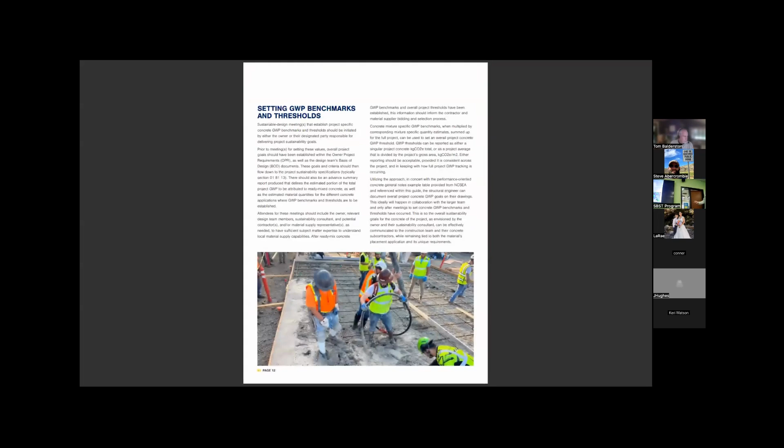Don Davies from our local MKA, former president there, led this task force. And as you go through here, I just point this out—oh, is this working? Oh. As you go through here and you see how it classifies global warming potential and timelines, you're going to get to a point where you realize, okay, do I really want to go through all this? And the answer is, if it's structural, then the codes of the ACI and the American Society of Civil Engineers will dictate, yes, you're going to go through this and you're going to use prescriptive mix designs.

But when we look at the world, the built environment, how many things are made of concrete that are non-structural? Just start throwing things out. Retaining walls, sidewalks, curb and gutters, catch basins. What else? Roads—well, bridges and freeways, but yeah, general residential. Right, you know, you get plenty of strength out of 2,500 psi concrete to build a ton of objects. We've got vertical gardens going. We've got all kinds of interesting projects that Lindsay's working on. And single story is certainly achievable with lower PSI mixes.

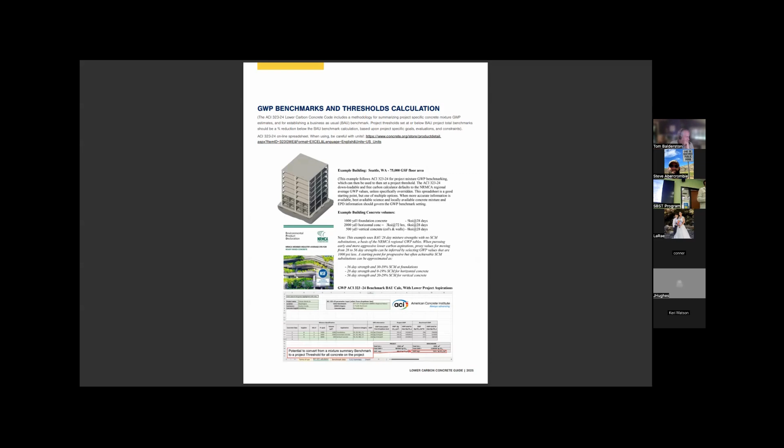But the reason I bring that up is because you have the carbon calculators in here that are being publicly sourced, and it's going to provide a database. And this is how you can move the ball forward towards carbon neutrality, is by participating in that calculator that they provide. So we'll just go back to presentation.

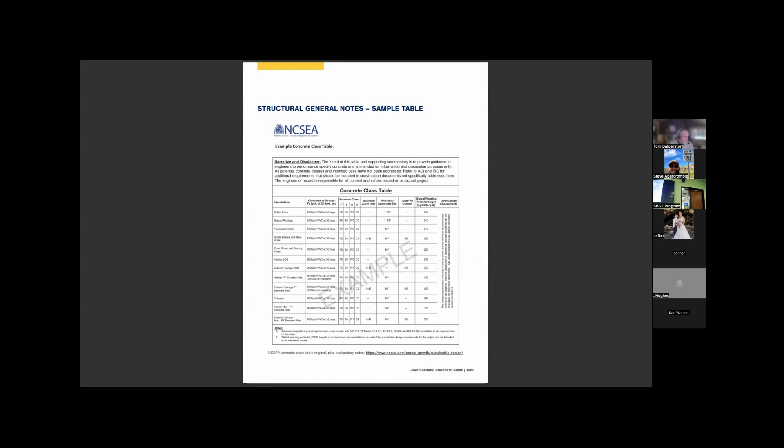How many of you have done a low carbon concrete project of any kind where you really pushed it? Anyone? 1, 2, 3, 4. You don't count. Ray? I got a low carbon project I'm working on right now.

Good. So here in Seattle, a lot of people have heard of Portland limestone and all that. It's been around for a long time, but it was used at such low levels, like 7%, nobody even knew the limestone replacement had gone in there. If we were to reinvent concrete, Portland cement wouldn't be the binder of choice. And just for the basics, there are 4 basic ingredients you have to have in concrete: cement, sand, aggregate, and water.

You get a lot of accelerants and admixtures and rheology additives and plasticizers, all sorts of things that pile onto that list, but that's still the basic 4 elements. And the nasty little secret, which is no secret anymore, is the binder, Portland cement, creates a lot of CO2 when it's being calcined, turned into clinker—not to mention the actual heating mechanism.

So that's where the idea of lowering—concrete's very indispensable. People wanted to lower it, and there were a lot of different avenues to doing that. Lowering the CO2 of the cement's a big start. Supplemental cement materials, fly ash, slags, other natural minerals are able to substitute out the amount of Portland cement you need.

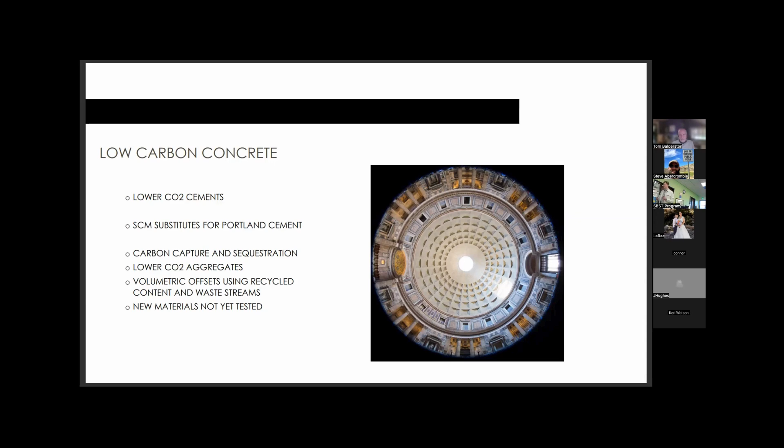So anyway, I got to move this along a little bit. This is not a small goal - it's a worthy goal. 8% of man-made CO2 comes from the concrete industry. So this isn't pecking around the edges for a couple of carbon dioxide atoms floating around. This is major, it's impactful, it's a worthy goal. It deserves our attention and a little bit of research by everybody in the design community.

Meeting human needs - achievable goal. I think right now there's a lot of different variations of what people set as their carbon neutral goals, different dates, 2045, 2035. But right now, the thing you can do is by incorporating things in non-structural applications, you develop the empirical evidence and trail for the engineering community to follow.

Engineers aren't trying to be a stick in the mud and slow down carbon neutrality - they've got a job to do, make sure buildings don't fall down. That's an important role in society, and they show a lot of integrity about that. So the more empirical projects that can be piled in and reviewed 5 years from now in 2030 will have a huge impact on the adoption of a lot of these greener cements and materials.

So that's where I want to jump into this, and I do want to make sure I save time for Lindsay because she's putting it into practice in a lot of ways already. And I also remind us that as designers and builders, we're trying to do things to meet human needs - housing, buildings, transportation, habitat restoration.

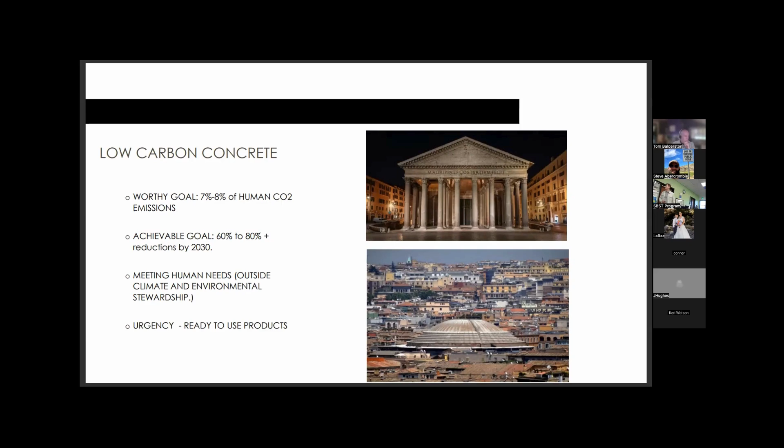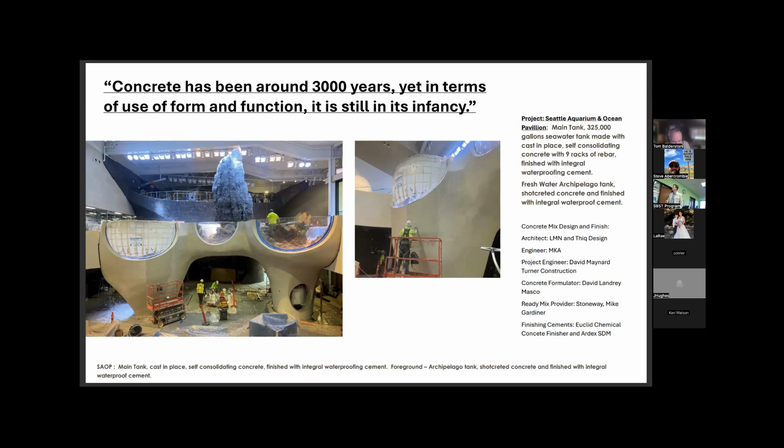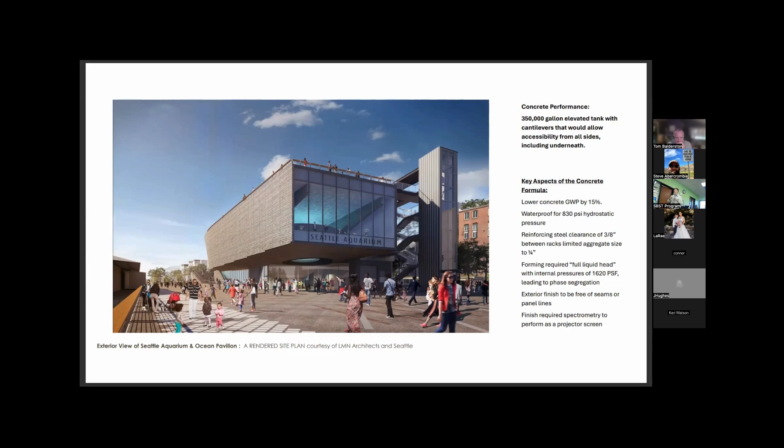When you think about this, their goal was to lower global warming potential by 15%, but the concrete had to be waterproof to 830 psi hydrostatic pressure. It had steel reinforcing with 3/8 inch clearance, so you couldn't use regular aggregate, you had to use sand. You had to have a full liquid head, meaning liquid from bottom to top in the formwork, which produced 1,600 pounds per square foot. When you have that much pressure, the sands will want to settle out - we call that phase segregation. And the exterior finishes needed to be free of seams or panel lines, and they also wanted it to perform as a projection screen.

Low carbon cement benchmarks - a pretty worthy goal. We're sitting here with a benchmark where concrete production produces 7 to 8% of human emissions. An achievable goal right now by 2030, I'm thinking I can demonstrate 60 to 80% reduction. There's a reason I've given a range of 60 to 80% - there are several different calculations, some from the EPA, some calculators like EC3 here locally, and they each come out with something different. I'll give you an example of how confusing this gets.

The concrete industry sells concrete by what dimension? Cubic yards. The EPA and everyone else measures carbon dioxide in kilograms. So when you look at the GWP, it is actually kilograms per... kilogram per square yard, what am I not saying that right? Cubic meters. Thank you.

When we go into the history here of going towards net zero, there's just a roadway littered with carcasses. This is a good man doing good work, but the first time he tried to take on the whole industry, he failed. I was at the ACI meeting when he debuted a beautiful carbon neutral cement from Calera Corp. It was a calcium carbonate. He was using salt water, brackish water, to sequester 100% of the CO2 from that. That behind him is actually the last coal-fired power plant in the state of California.

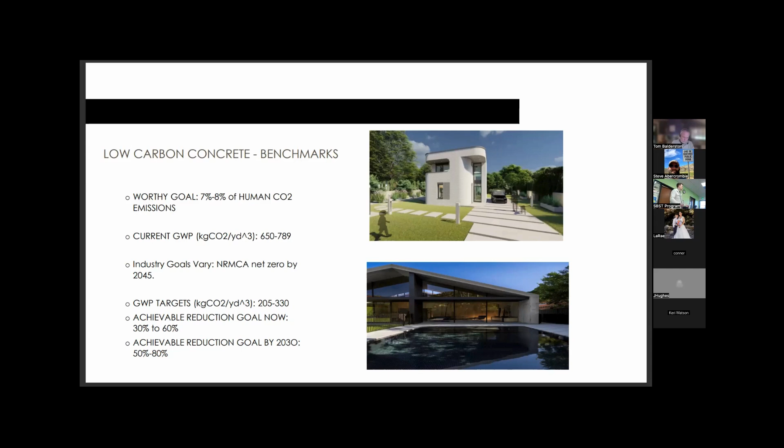For the NRMCA, it varies a little bit, but targets right now, just here in the Seattle area, are 205 to 330. This is a very local thing. In fact, even the ACI right now has 25 regions that differ - it's all about local, what's available, who do you know, how does the community collaborate, can you get this cement in the market on your job logistically and feasibly. That's a tough question, so they're actually expanding it from 25 regions in the United States to 50 so that people can work with their local suppliers.

Achievable reduction goal right now, with what's on the market and what I'll call project ready - again going back to the lower carbon concrete task force recommendation - we'll call it project ready.

It's been proven in lab, it's been proven in field, it's going through validation against code. That's kind of where you want to live, because you don't want to be on the bleeding edge. You want to be on the leading edge. And that's where I'm trying to place this discussion a little bit.

By 2030, though, with just what we see on the technology horizon now, we could be very well on our way to a 50% reduction, 80% reduction in concrete GWP. So we're making some progress, that's very doable. A lot of people got to cooperate.

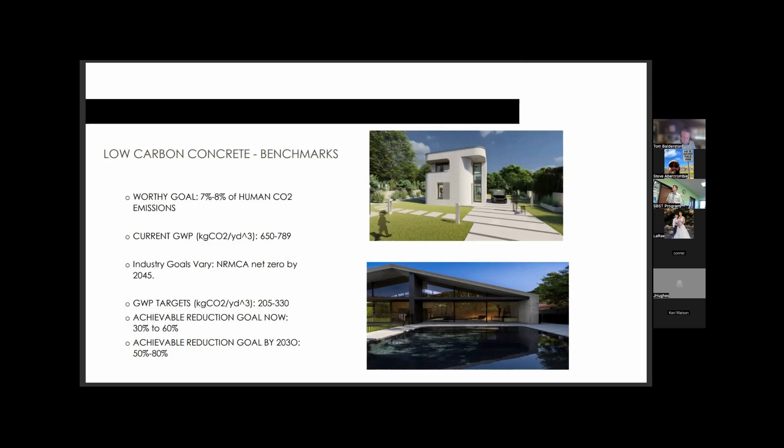So I brought here 5 materials. These 5 materials here, which I'm just going to run through real fast. These are all plausible and available.

First of all, you've all heard of type 1L. There's also type 1P. The P stands for pozzolan. The L stands for limestone. In essence, these are added and blended into the Portland cement to produce less carbon dioxide total for the cement without decreasing the cement strength.

There are differences, though, and there is pushback. There's lots of people saying they got a problem getting it beyond this range of 11 to 15%. Most people here in Seattle are running 13.5% limestone added. Does anyone have any questions about what that means? Adding limestone into your Portland, what that means?

It means a slate limestone that's been dried but not gone through and released all the CO2 is blended into the Portland cement. It slows down the setting of the cement a little bit, but its ultimate strength is equal or higher in lab. In practice, it changes some of the mechanical properties of the concrete, and there's been some questions about whether you can get to 30%, and how far are we going to push down this road before it's not concrete as we recognize it.

So I'm working with a lot of people who are trying to look at the stuff. Even the school here, Mike's group, has opened their doors to looking into this issue. So, can you use that in addition to fly ash? That's a more complex question.

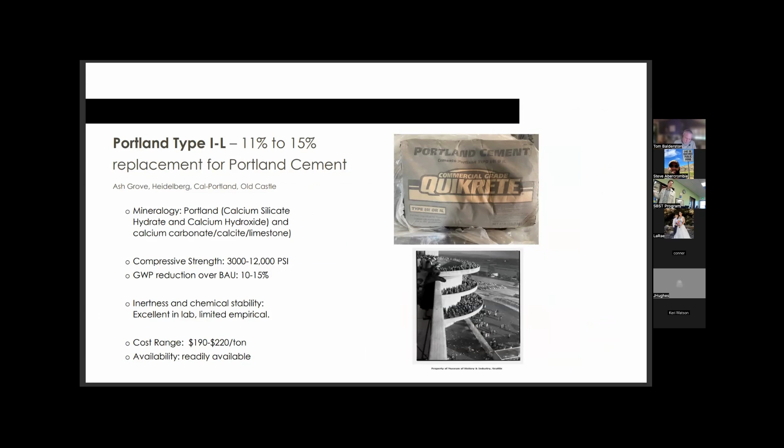And this is important, everyone should know, regular concrete... oops, went too far, where do I go backwards? There we go, sorry. Regular concrete Portland type 1, I put the cost range as 190 to 220 a ton. Big difference between whether you're buying silos of cement or a bulk sack or a little tiny 50-pound bag. But keep that in mind, it's important to have a relative idea of how much it's going to add to things.

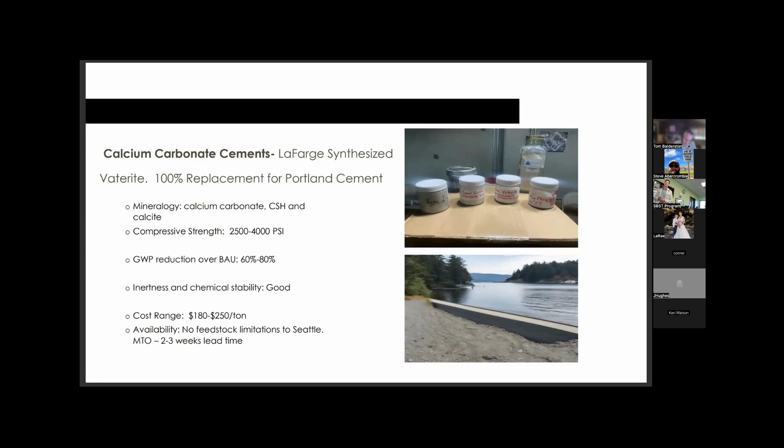This Vaterite is running about 180 to 250 per ton. Its availability, there is no feedstock limitations, but it is made to order with a 2 to 3 week lead time. We have two resources for it: we have Lafarge, and then they have Forterra.

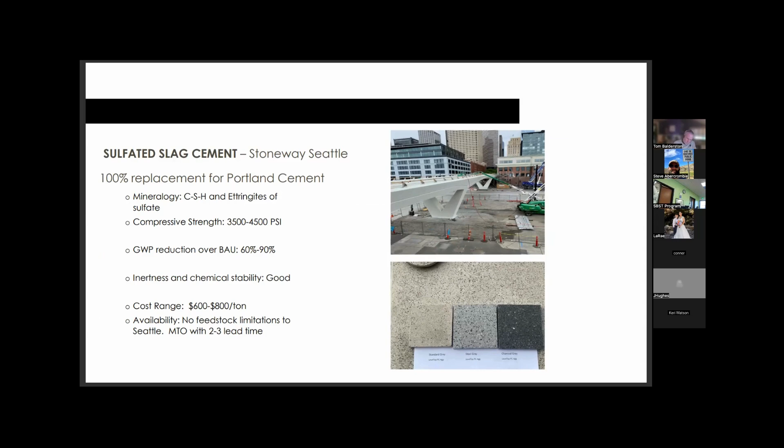That's integral color. Yeah, the natural color would be that one right there. Okay. Yeah.

Finally, this one's not a cement, it's a super... or excuse me, I didn't have a category for it, so I called it the zeolite guys. I guess because it has an improvement in reactivity with Portland cement and plays well with it, it's a little different than your typical SCM, which is fairly neutral. It might improve workability, but it doesn't really improve performance, durability, and strength. This particular SCM does, called Zeolite.

You're going to hear more about it. They might have bigger future plans, but again, I'm trying to keep everything here and now. What is available? What do we know? It's up to 50% replacement of Portland cement.

That's a pretty good reduction in your CO2 content, your global warming potential, and this is important, without compromising the strength of your concrete design. So if you have a 6,000 PSI structural concrete mix and you put in up to 50% zeolite, you're not going to see a change in your 6,000 PSI structural performance.

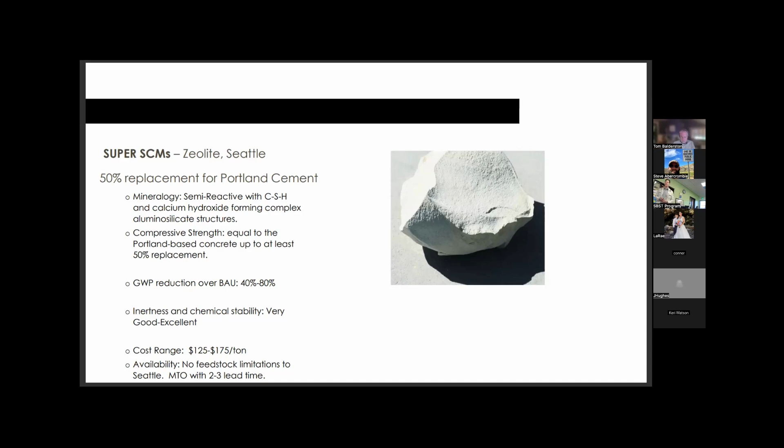Inertness and chemical stability on this is very good to excellent. The cost range with freight to get it here is about $125 to $175 per ton, so it's less than Portland cement. No feedstock limitations. It's made to order. The natural material is just laying on the Mojave Desert floor, so it's not manufactured. It's just a matter of getting it here.

I didn't know Heidelberg would be here, so I'll probably never be employed by Heidelberg, which is unfortunate because they're an awesome company.

What I was going to say is, don't let the perfection of being net zero and going as fast and aggressively as possible get in the way of doing something.

A lot of ready-mix people aren't going to be thrilled about cleaning out their silos and throughput mechanisms to load up your truck. So if you've got a project that's 20 or 30 yards of concrete, you're going to get charged for that if the ready-mix guys really want to do it. You might be better off looking at your other mix options.

I'm just going to run through a few of them again, trying to be practical. Yeah, you're talking about the currently available mixes you've heard of, like Brimstone Energy, calcium silicate, 100% offset, which supposedly should be available in the next 5 years or so.

No, I definitely have a list of about 100 things that would be fascinating to talk about, but my criteria was being project-ready and available in our market here now. So some of those didn't make it onto my radar.

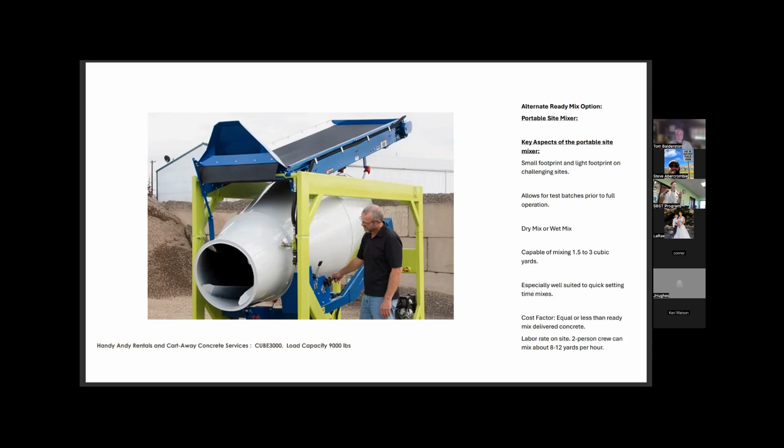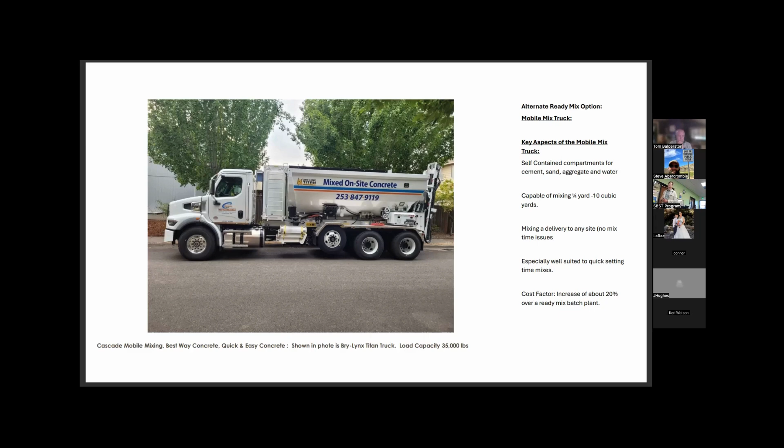This is really great because on some sites you're not really close to a batch plant. This can go anywhere, and they don't mix it till they get to the site. It increases your cost factor about 20% over the batch plants.

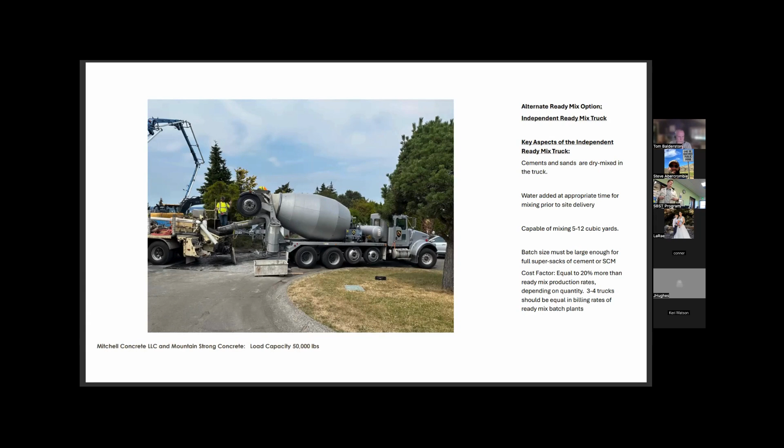And finally, there are some independent ready-mix trucks. These guys generally will get their aggregates from whoever is the local aggregate supplier, or will have an agreement with somebody. But the people I talked to on this particular issue were happy to take a super sack of any of these low carbon cements and dry batch it. That means the truck has to be dry inside, dry batch it with the aggregate, and then add water at the appropriate time as it gets to the site.

And these are the contacts and companies in the small, medium, and large mixing world. I'm sorry to have spoken as long as I did. There you go, Lindsay, you're good. I think you're good.

Thank you, everybody. My name is Lindsay. I'm a landscape architect, and I started this journey, started the firm about 3 years ago, and really put it into practice over the last year after going out and trying to understand it myself. The title of this is Site Features 2.0, rethinking some of the things that I have to deal with in the landscape architecture world. I'm excited because there are so many different professions in this room, and part of the journey has really been learning and meeting new people along the way.

I got to figure out which direction this goes, or where I point it. The top arrow is forward. That big one, got it.

Okay, so real quick, this is me. I own SKAPA. I have 25 years of experience as a landscape architect. Some of you I know. After that 25 years, I really looked at what the idea for the firm should be, and I wanted it to be different. So I've taken this firm and flipped every single thing around based on my experience in other firms, where I've run and managed and stuff.

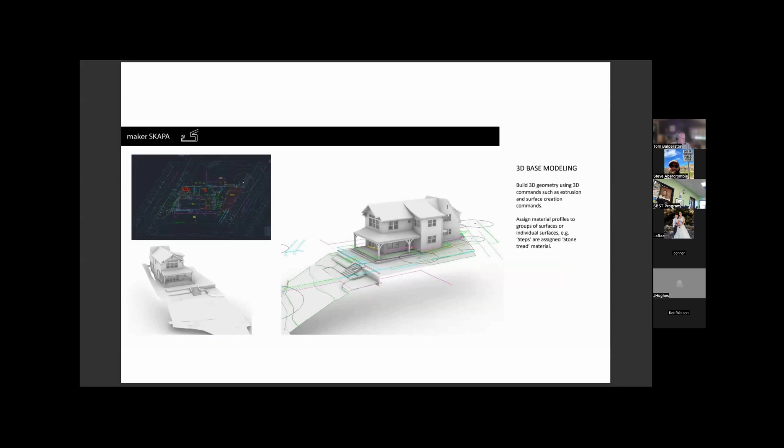This is a typical workflow in a design office: CAD, modeling, going back and forth between the two. So this is what we're looking at on our screens. The idea of the blender, what I call that person, is someone more likely to be in an architecture office, a design office.

They are working on the modeling and selling the clients with Lumion and all the renderings you're seeing for all this. But they're also very knowledgeable about all things 3D.

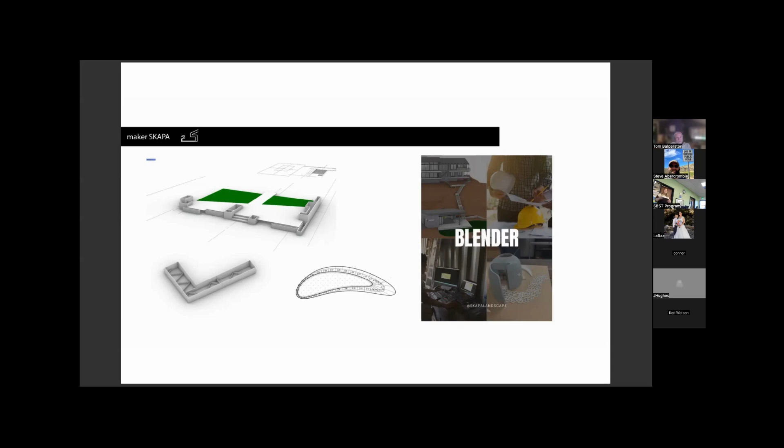So you might be looking at a master plan, but you see components like this. I'm clearly looking at the landscape, but finding components where maybe we can implement other technology to accomplish those. So I see Blender being able to understand this.

They also have to be able to talk to the slicer. And the slicer, I envision as somebody that works for a general contractor out in the field. This is guaranteed the new layout - we've actually put a Sharpie in the machine and drawn the layout, but the field is going to get your file and run a dry run, and you're going to hope that it works. If it goes way out, they're going to call back the Blender and ask them to fix the file.

But a slicer should be able to deal with tolerance on the site. It's never going to be a flat site, and these are actually things that you'll see. So the slicer would see - the robot will actually tell you whether you're off or on, but you're wanting to read that. You're also thinking about construction management, how you're going to print these. So you know about the space.

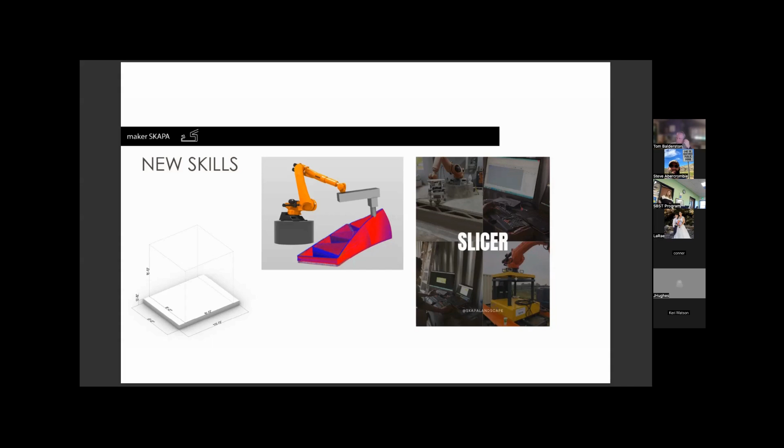And so from here through the next few slides, I'm literally taking you from the process of when you see it as a designer all the way through to the implementer. So these are typical Rhino models that we use. We go from Rhino into the machine.

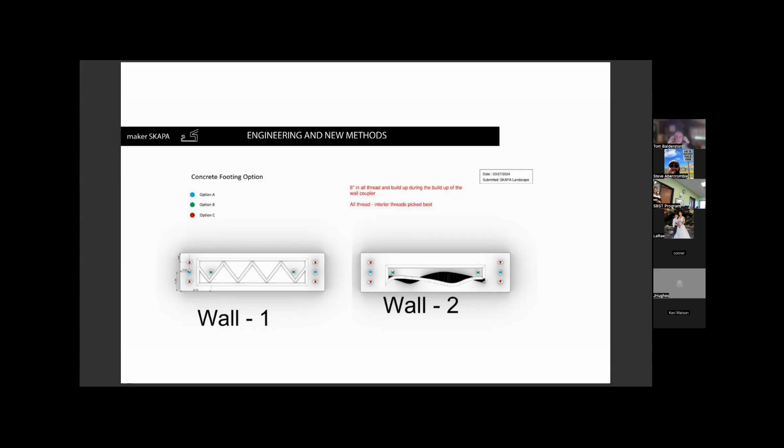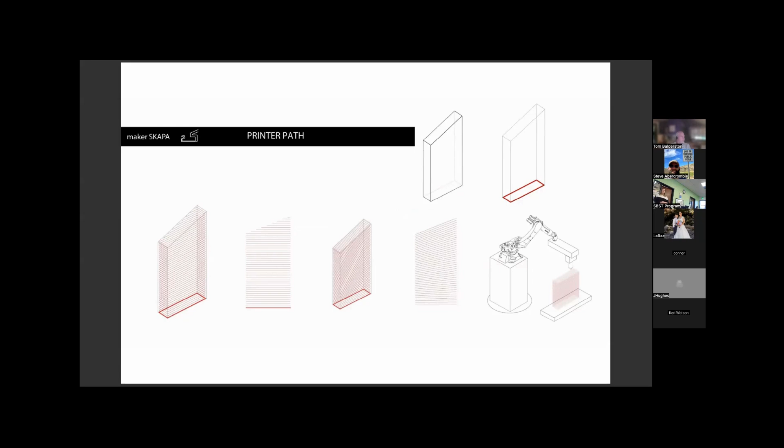This is a typical - okay, so you're a designer starting to work in SketchUp and you're thinking about these things. As you move into development, you're starting to think about printer paths and layers and all the different things you want in a design, and you're starting to implement that kind of in your blueprint phase, the next CD set.

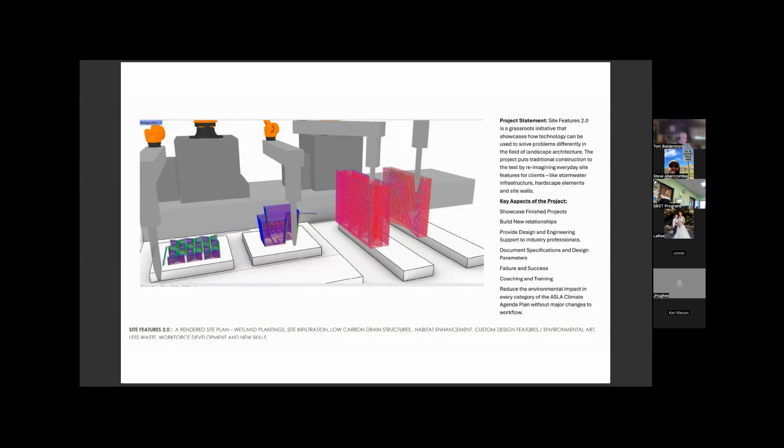And we might set up and do all three of these in the day. You're going to want to kind of understand that. Anyone who works with concrete knows that.

The next step is obviously it gets out on site. So here is where the journey collides with this building in the local 528. Because for me, I can only do so much - I rely on the craftsmen and all of the construction to actually implement what I want to do.

I am so grateful for this relationship because I don't have to worry about quality. I know that they don't want something to fail. So if my designs are being built by the union, I feel like they are really putting in all the effort that I need to actually construct it. That makes me feel very confident in trying new things.

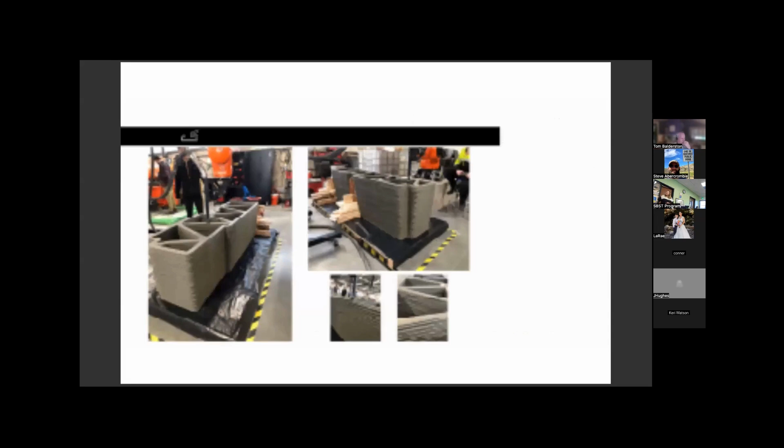So on the left there is Jordan, in the middle is Cooling, on the right was Angie from the robotics company, all working on this the first day. Jordan worked on the robot from day one. Everybody was able to use their skills that they already have on day one and show up when this thing showed up here and set it up. That was eye-opening to me - it takes the whole team, but it was very easy to accomplish.

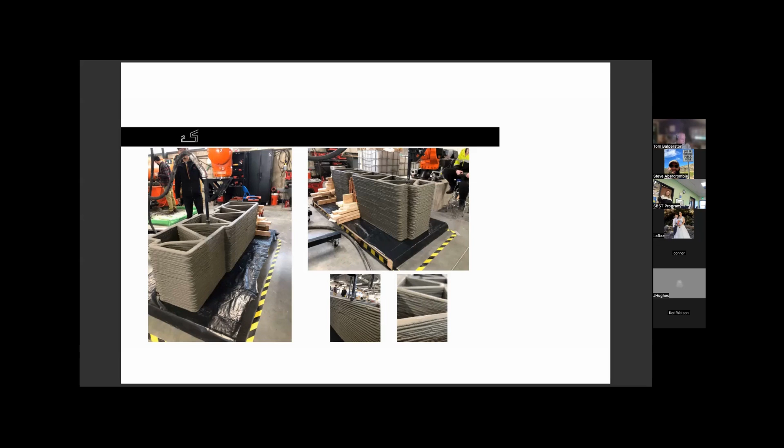So here's a picture of some live printing in a shop. As far as technology goes, I would say South Seattle College - some of the community colleges - are really teaching the actual technology of the robotics. That's where I'm seeing it, and they're the ones printing things. You have to have a guy like this to trust 100%.

So this is us doing a little bit with the union and then doing the mixing here, and on the left is the robotics technology. It is a 6-axis arm robot - it's a KUKA. That's not the proprietary piece; you can find KUKA doing everything in factories. In fact, it's bagging the cement that you're buying in the factory. It's crazy.

The proprietary part is the actual slicing and putting it in and having it read it and print it out, and that's the thing you have to learn with the actual robot. However, I still see it as a tool - no different than a tractor once you get used to it. An architect or designer would still need to know whether they're going to build it with that robot or a big gantry system, that would change things. But outside of that, you're specifying what to use.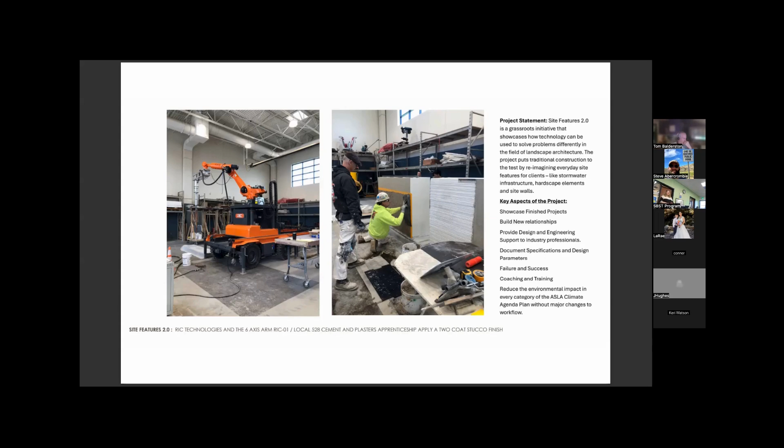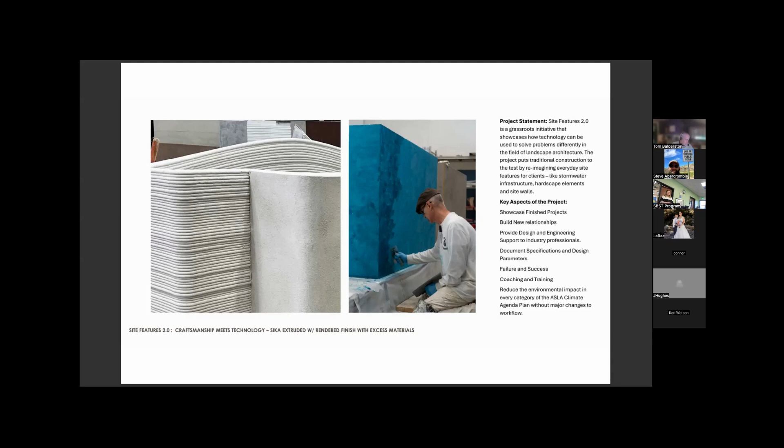That's where the Plasters Union came in, Cement Plasters Apprenticeship—that's them on the right finishing it. We're going to walk around and see a lot of these finishes, exterior and interior, more than I could have imagined. On the left is a layered look finished with leftover material, next to it finished with excess Sika material, and on the right, a Venetian plaster.

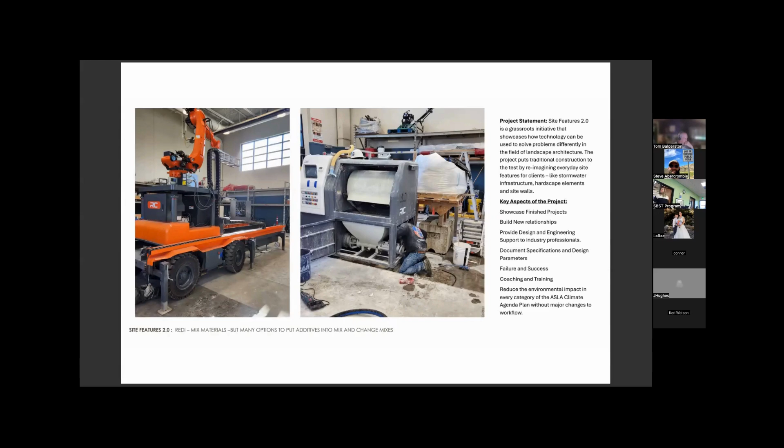I show this picture next because it's the mixer, and that's really the key to some of the next slides I'm going to go over.

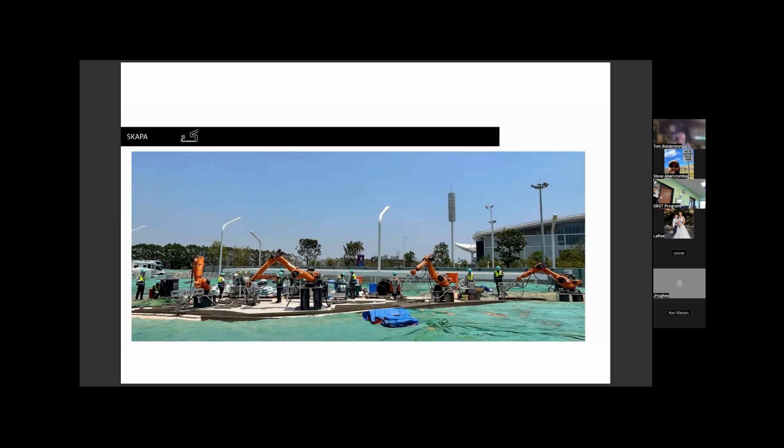Which gets me thinking about actual green infrastructure and projects—so that's this section. You'll see the process, how you get there, and how everybody in this room should be able to relate to one of the earlier slides as to what they might be doing day-to-day. I really wanted to reevaluate what I do in the landscape.

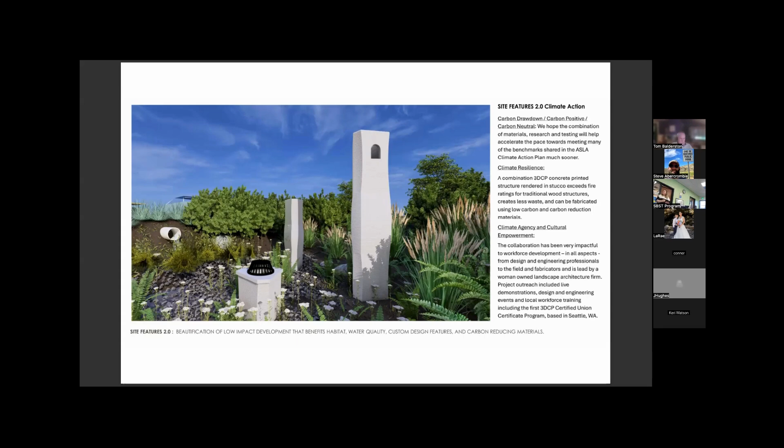However, maybe they could. Maybe we can have more artful features and habitat included in these things. I'm looking at ways to not only solve carbon but solve many problems with one piece—how many more things can we do?

This is another idea where I started pulling across pieces. I'm using low impact development standards set forth by the city as my guiding principles. If I can show the city that it works and holds water, I'd call it a bioplanter—it might or might not meet their standards, but I'm trying hard to show that it can. So this was rethinking things.

This is a project in Greeley, Colorado, where we're doing some low impact development. I'm implementing some parts of this, not all, but the idea of being able to implement small projects with a smaller workforce, or even build this in a shop and bring it out to a site to drop in stormwater planters—those are the kind of low-hanging fruit I'm looking for.

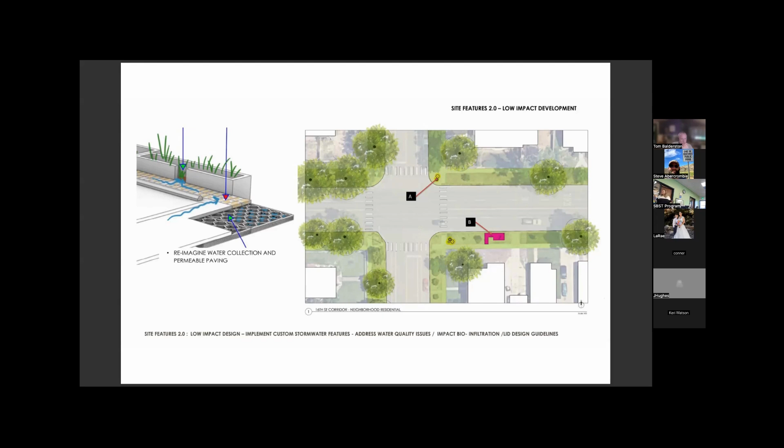This is a stormwater planter that I printed. It would have met all the standards for a City of Seattle project—it was modeled after a house project. The city requires that much bio-retention, and obviously we have a general contractor; it's formed, and all kinds of work, effort, and waste goes into it.

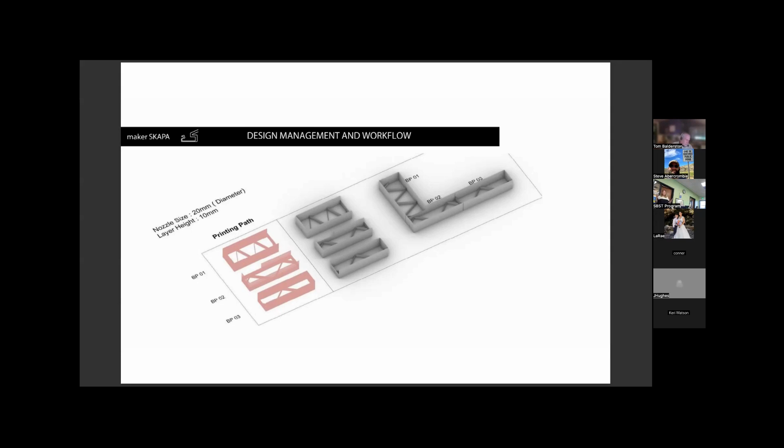They're big enough that I could almost put my truck in it, so I'm thinking about ways to just do that less. It's a 4-inch wall minimum on either side, but here I'm doing it with 2 inches—a lot less material—and it can be delivered to the site. This just shows how it might be thought of.

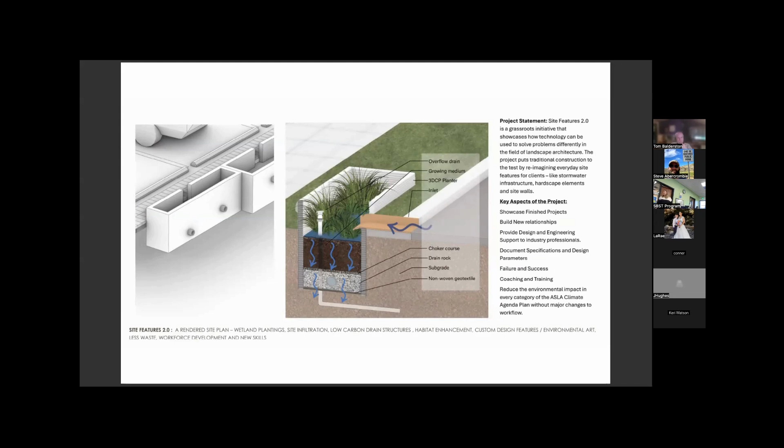This is another concept, probably something everyone's familiar with, the bioplanter, the non-infiltrating bioplanter. I just love this idea that they could be beautiful. This is one that we finished - it would have met the City of Seattle standards. We did a double wall just to get the thickness, but I could also envision this as a spa, being able to insulate these pieces and things like that.

We finished this one, but I think it took us 3 hours to print something like this, and to be able to do that with formwork - we didn't have any waste, something that could be dropped off on site. This gets down to an idea that I started to think about.

This was the first slide, and then I met Dave, and the next slide is one of my more exciting slides. I call this, for better or worse, the wet rat slab, because I have this idea that it could come in and store water and things. I'm being told by engineers to hold water on site, et cetera. We're always doing a regular 4-inch slab, but if an engineer told me I needed to do an 8-inch slab and manage all that water in one place, I'd be solving more than a few problems at a time.

Filling these with some sort of water quality material like pumice or other things where we're just trying to achieve water quality on the site. They're all things we have to do every day.

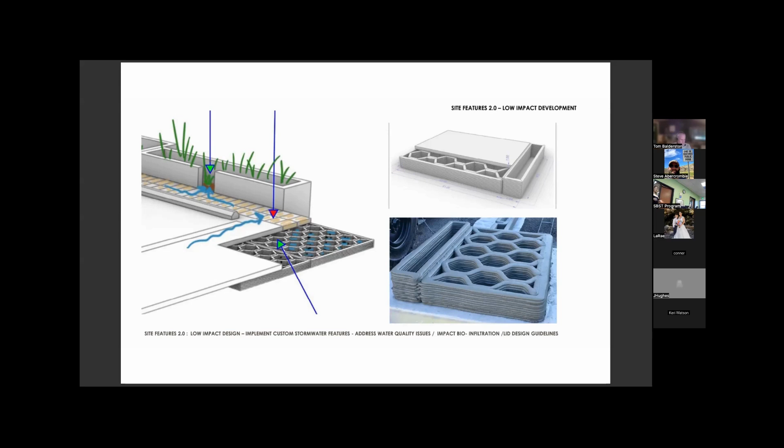I also do a lot of high-end residential. As much as I want them to want this, my clients don't usually want to go from their 2,000 square foot onto permeable paving. I'd really like to find a way to make something permeable, but also use more high-end materials to do that. So this idea that maybe I could bring water to a drain and then underneath in the slab - I feel like I could get a lot farther in some of my designs.

And then I met Dave. Dave had this crazy awesome idea that I really loved about all these mixes that he went through and spoke to, because the technology allows us to put additive in right then. Like, one day I hope to be able to put waterproofing in there and never need waterproofing if I did a container, a spa, a bioplanter, or a water feature. But this takes it to a next level because with that technology, we can switch things out - we do color, we do different things like that.

The different colors you're seeing here - the idea that we could do the orange, something more structural, almost like a bit of formwork, load-bearing pieces would still have this ultra high performance, approaching 18,000, incredible, 20,000 PSI.

And then, even in the same design, be able to switch it into something like a mortar mix where we're more CO2 neutral, to actually change while you're doing these kinds of construction things. That's kind of the thinking.

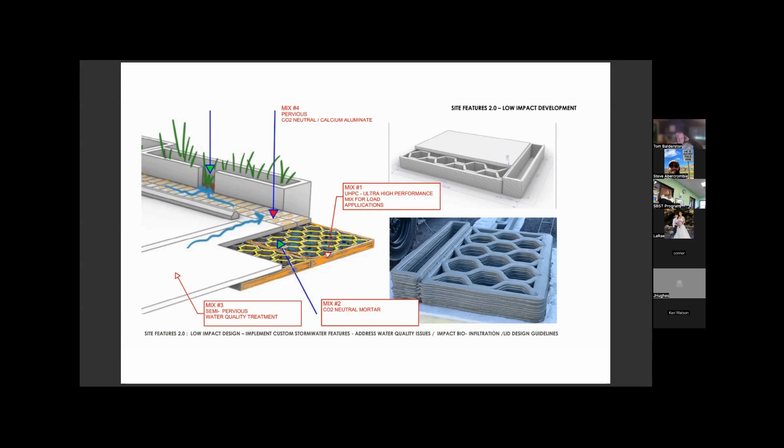Also, we know we have permeable pavers, but a lot of times the permeability comes from just the slot, right? So the idea that these pavers could maybe be porous and also water cleaning on top, somewhat of a semi-pervious wear tread in a parking lot, versus using monolithic everything all the time.

Rethinking the site wall altogether. I'm asked to calculate impervious surfaces for things like walls all the time, and you think you got it all down, and then you go do the calcs on your wall, and goodbye wall. So this kind of thinks about it differently - it opens it up to maybe being a planter wall, could also be a bioplanter, but just the idea of being able to retain something and plant it and not use it as monolithic, especially on the 4 feet and below landscape features - this idea of rethinking the wall.

Obviously, I can have a lot of fun with my designs. None of this has any elevations the same. It's built to kind of segment and go together. So if you wanted to have this on a project, maybe you don't have a general contractor, but you'd still like to have concrete on the project. This is a chance to do more custom features for people without as much expense.

I'm also looking at, in this situation for a small wall, why even have it be two? Why couldn't it just be one? You're going to go out there and you're going to see it, touch it. You can imagine just having a little smaller planter wall, and that's it.

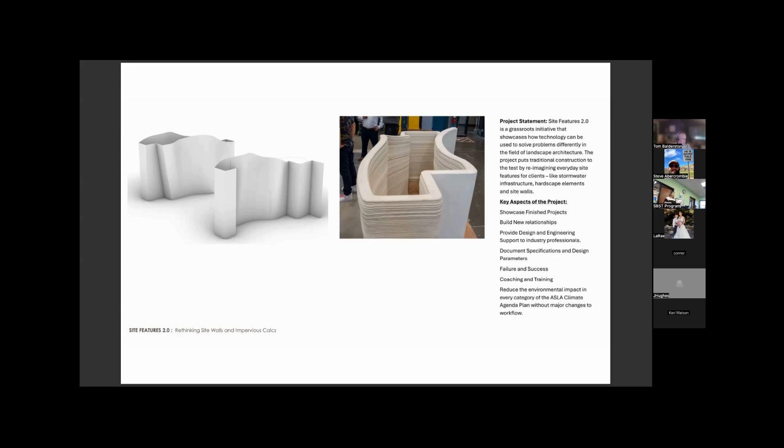We did a lot of different finishes here, so this one gets turned around. This was another idea that kind of started to generate. So now I have this gap in the walls. I can plant them, but I can also think about integrating passive, or maybe it's not passive, but somewhat of a mechanical opportunity to have a misting system inside these things with irrigation. I'm already doing irrigation, lighting.

This was a little bit of an exercise we did for the Seattle Design Festival, where we thought about walls. We all know we got a park, we put in lots of trees. That feels good and cool, but also there's this opportunity to maybe have site walls that go throughout that can also cool you off. So instead of a fireplace, a cooling place.

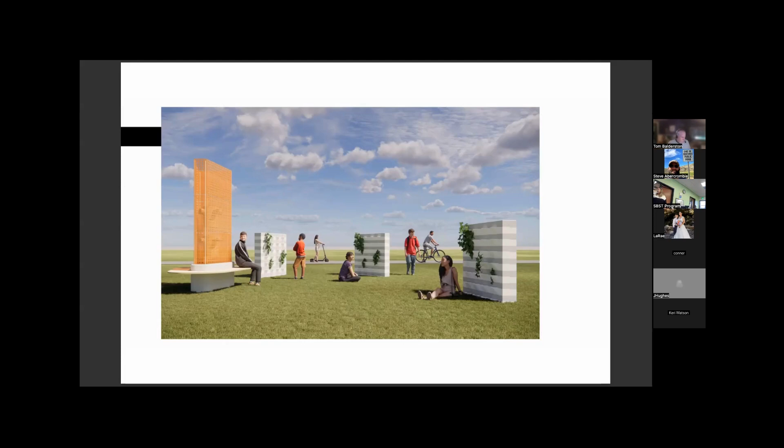That's what the tower was on the left. And this is here. So we actually built these with high school robotics, Mountlake Terrace High School robotics team. They just came in 16th in the world at robotics. I engaged them to help with this. By the time I was done with this introduction, they were already modeling it on their computers. My intern gets dropped off by his mom. It's awesome to incorporate that into this, thinking of hiring different people and asking different people to help.

Climate resiliency is obviously big on everybody's mind now. So this was a chance where we invited the fire department to come and give us some data, because to be honest, the insurance companies don't really have the data. You can kind of sit there and stare at it, but they don't really have it. So we're trying to actually build things so they can come burn it down and get that data. And ideally that starts to get things into code, more acceptable.

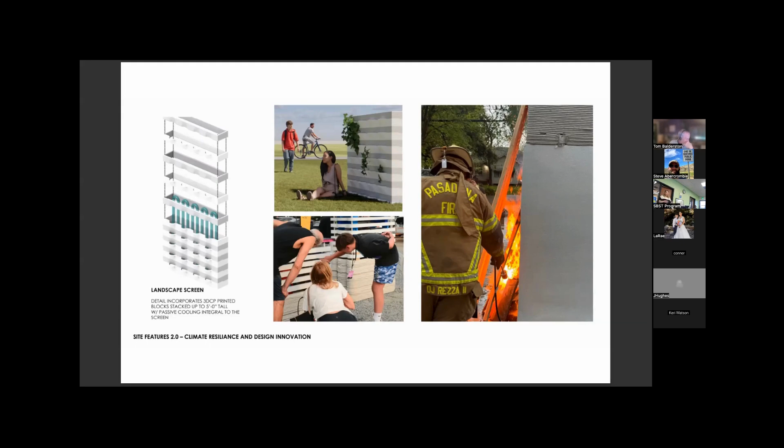The things that have been built to code today are basically off the masonry code, following masonry code for the most part. So we do use reinforcing and things. This one is one example of many ways that people have really solved some of the reinforcing. This is a threaded rod, so you're able to thread it up as the machine moves up. It's got its top and bottom plate. And then we're also just pouring the column into the design, so the design is part of that thinking as well.

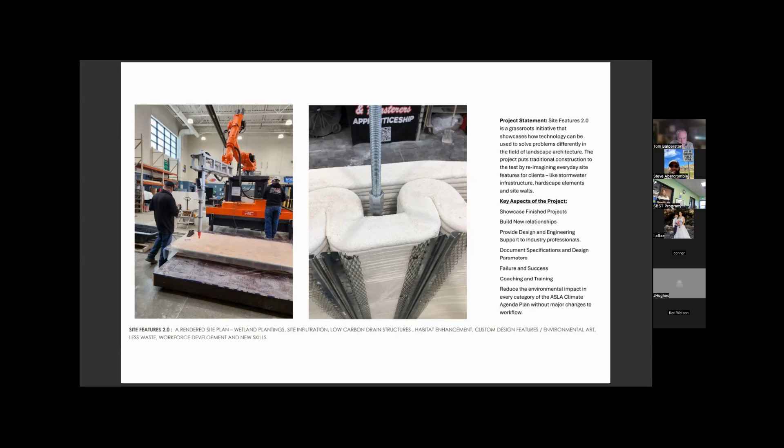And Jordan back there, when we go walk around, I hope you get to see it. There's an idea about skeleton footings. We have a lot of cool names: wet rat slabs, skeleton footings, things like that.

This one is kind of for the architects and everybody, but really it's wanting to show how this process works. We're going to go and do custom features for our clients, and then we're actually going to be able to print these pieces here and finish them the way we would want them finished anyway, and drop them off. No form work, and ideally using low carbon concretes.

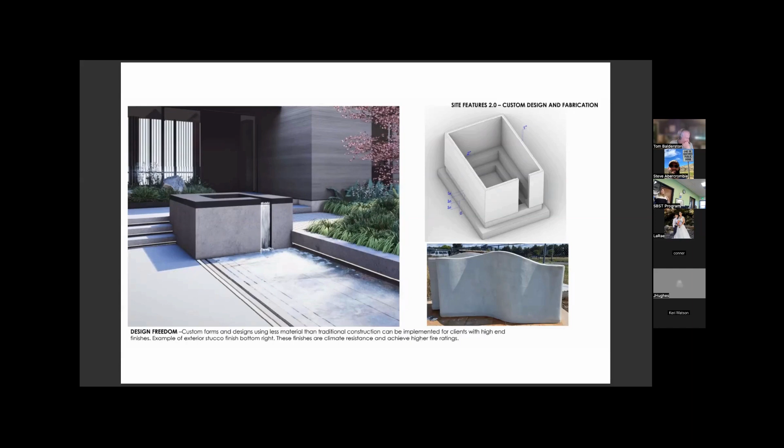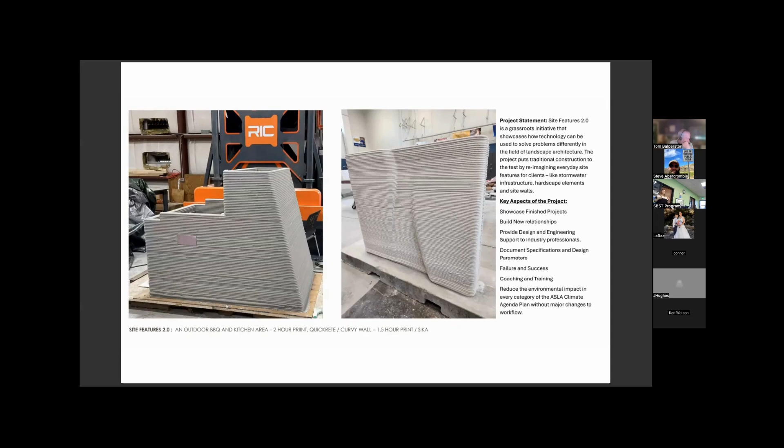I have printed mostly with Quikrete and Sika. Sika is low carbon concrete at the high end of that range, but there's the opportunity to do things in the landscape with different mixes, things we've achieved in the design. That was like a barbecue fire, outdoor kitchen type situation. This eventually gets rendered and has become part of the gallery out here, but I can see that as a water feature wall or some sort of screen, and it's an open cavity.

So the reason I end on this slide here is because I am here to say, a lot like Dave too, is that I'm not necessarily here to preach. I am not necessarily here to teach, even though there's components of both of those things. I really am here to coach people in how to use this. And I've gone through it. I believe in this.

I see this as a way for me to maybe bring it to others. In my mind, this is my ideal shop where you have a gallery, the design office, the robotic construction shop, and maybe finishing bays outside so any contractor can come. It's a lot to ask someone to invest in this all, but if there's a chance for me, a small firm, to implement the signage at the convention center project that I might not be able to win, it's a chance for people to try it, learn it, feel comfortable with it, use it when they can. Bring your own files down. That's what I ideally would like to do.

I have spent time now in every one of these stations and feel very comfortable with the technology, and just get really excited about it moving forward. Materials lab is where? Next door.

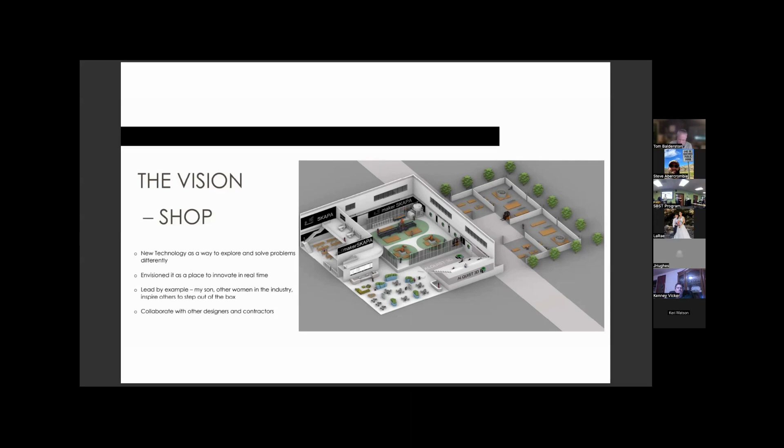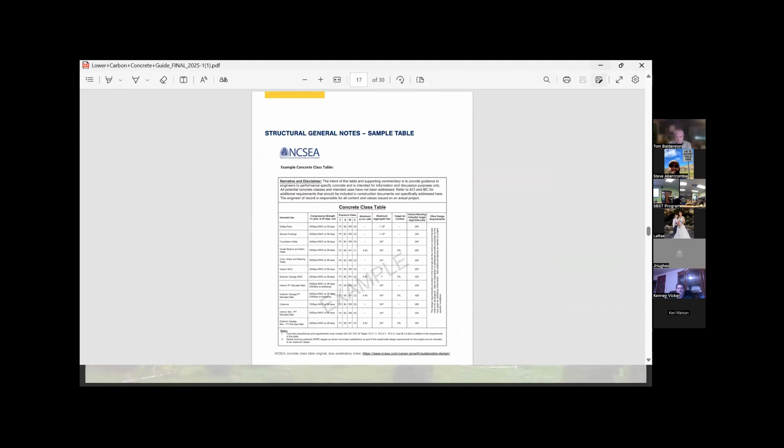So I'll go in, if you don't mind, John. That's part of the reason we're here involved. We believe in technology, economics, low carbon. Unfortunately, I've made a good living in an industry that is polluting the world. I can admit that, but it is a structure that has to be done. This is what the world's built on, is concrete, right? So I'm excited to know there's other partners in the industry to help produce these structures we need, more environmentally friendly.

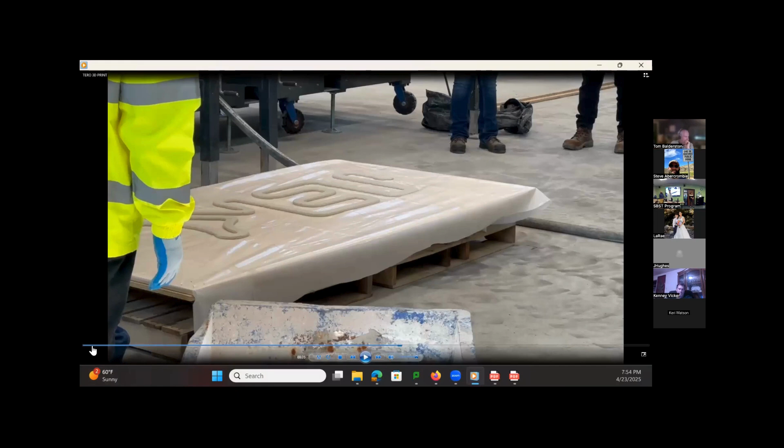And we all need to collaborate together because we've got workability and finished product in the end, because we know lab results are completely different than real world results. Dave asked where some low structural projects can be done, projects that can be tested real world now that can promote more people to be involved, more industry partners to help move things along to a higher volume level. We have to start small, right? Be it our sidewalks, our planters, our bioswales, 3D printing, all these different options that we have. We're excited to take part of that and help bring you guys here and be a part of collaborating to help better the system.

Stay in that tight window, because if we fail, the world's gonna say that doesn't work. Hey Mike, give this a minute, I think I'm sharing this on the screen. You or Jordan could say what we're seeing here.

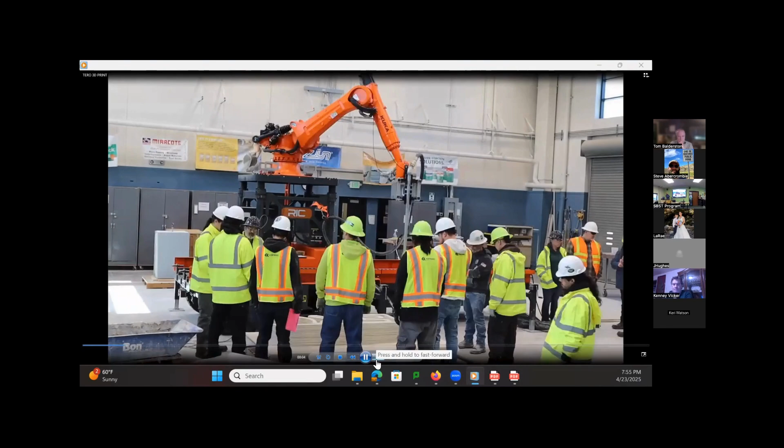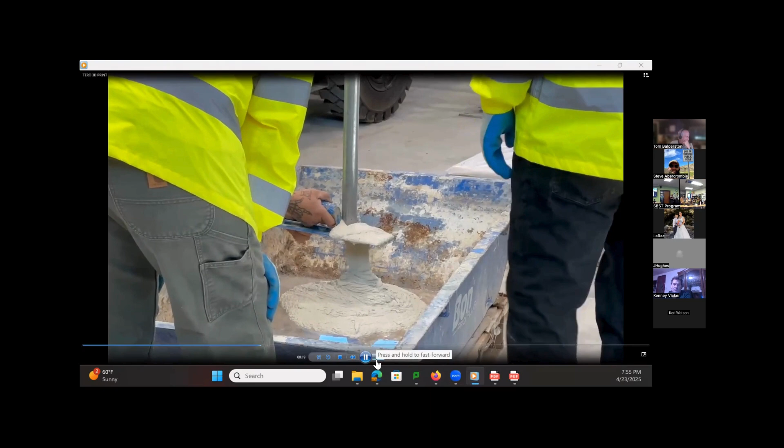All right, LaRae, so here, that's our shop. We become partners with Lindsay, and we're working with Zeolite. They're the ones that have helped us with some products. And Dave is a long time part of our training facility for over 30 years now. I was an apprentice learning from him, but we're trying out materials, seeing how it works here.

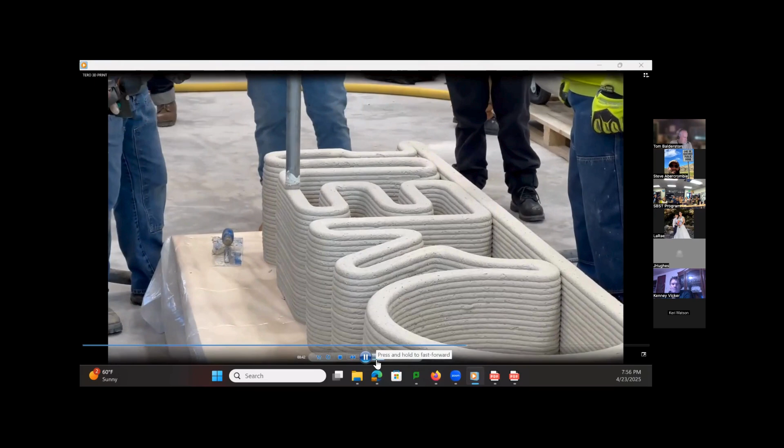Here we're with another group showing the ability and creativity of material. If this is a concrete structure, we're creating a bench here that's arched with less material, so that's a good thing. There's zero formwork, which is good for saving money on waste and other nature-acquired components that, as human beings, unfortunately, we are all consumers of natural resources. So here's a way to limit those resources and the production of making those resources. Great concept.

Yeah, so I wanted to stick in my lane on the cement chemistries, but 3D printing is my point of it. This concrete is really in its infancy. Concrete is nothing more than a sophisticated brick. The way that we use concrete isn't really how it was born to be used. What I mean is, you go from the stones of the Egyptian pyramid to bricks of later centuries, 17th, 18th century, and concrete was just an extension of the brick. Because how do we form and cast it?

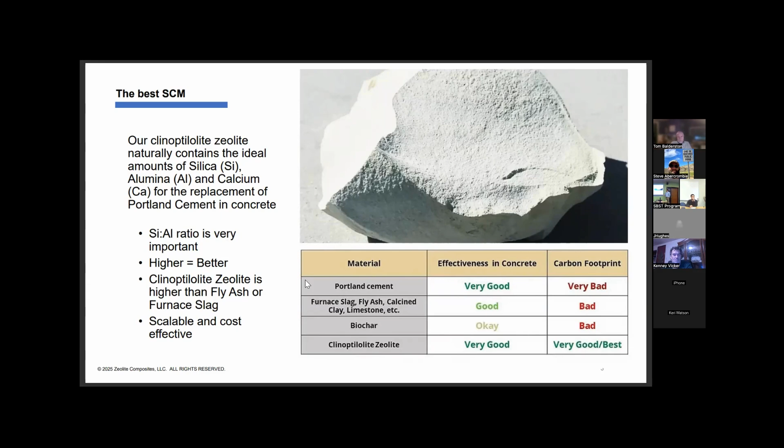Yeah, no problem. Right now. Oh, there we go. Okay.

This is a fun leave behind. We created a couple animated videos to talk about what zeolite is, where it comes from, how it works, and why it's such a good replacement for cement. We're really excited about the opportunities with pavers in individual yards, personal choice, but also municipal projects and larger scale projects with other partners, rapidly removing carbon footprint from things that get put into our environment. I think we all have a shared responsibility of making good choices, for ourselves, our neighbors, our families, our communities. These are small steps we can take with readily available solutions on the market today to drive these rapid changes for the rest of us.

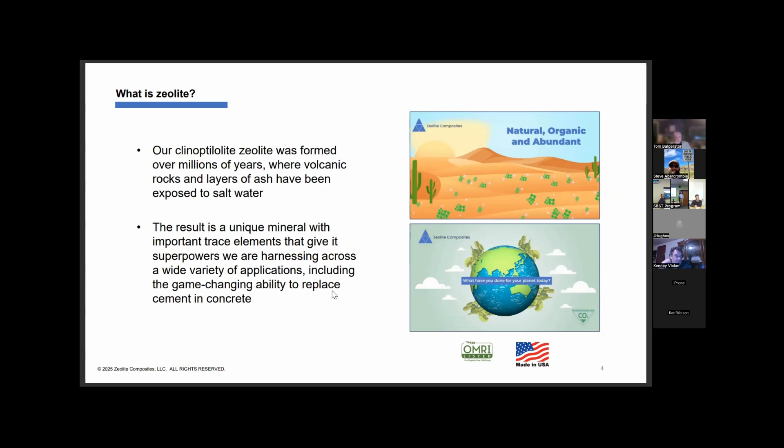Ton for ton, some of you probably have this math memorized, but generally speaking, a ton of cement produces about a ton of carbon dioxide. It's a very large amount of carbon dioxide for every ton of cement produced traditionally today. There's energy input to effectively calcinize the limestone, which produces CO2 as the off gas. We've been building cement the same way for a very long time.

The advantage that our solution has is that it doesn't require significant energy input. It doesn't produce any byproducts like carbon dioxide, and it's an effective replacement out of the box for cement. So when you think about all the ways we've been building cement for a very long time, we're able to bypass a lot of the hurdles and speed bumps in place today to get to a better solution.

As you start to think about how these threads get tied together, you think about things like LEED and Built Green. These are really effective tools for people in the architecture or building trade to understand the choices they're making with materials, whether it's bamboo or other building materials, including concrete. What choices can they make to reduce the carbon footprint of that particular project?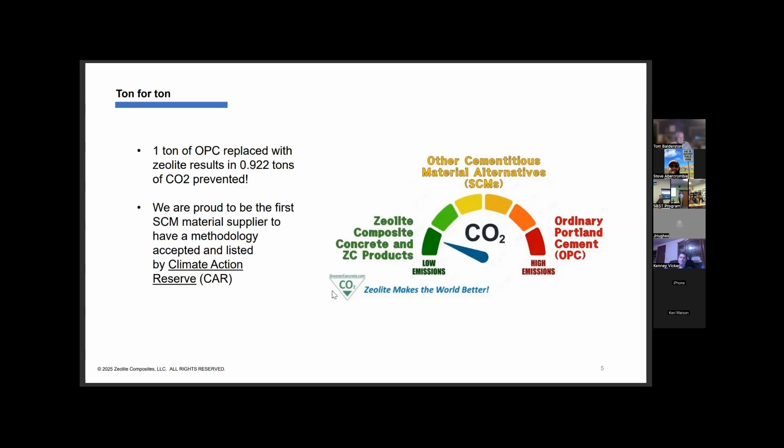So we have the ability now to operate in this interesting space where we don't just have a solution that helps customers with checklists and points. We actually have an opportunity now to help industry by creating offsets that can be purchased for things that might be creating the need for those. We're really excited about this as a future opportunity.

There was a question earlier about the relative strength of some of these solutions. We've done years of research through our friends at University of Washington to put the science behind how zeolite composite concrete works. As you look at all the ASTM standards required for structural concrete, and amazingly, pavers have to be almost twice as strong, the compressive strength after 7 days with a fairly modest amount of cement replacement is significantly higher.

The other tests in terms of look, feel, slump, and compression all meet or exceed the necessary specification. So in terms of the mechanical performance, the properties you want and need from an alternative to OPC or limestone cement, we're able to prove this with evidence, and there are now peer-reviewed papers around this approach that show our zeolite composite is an effective path forward.

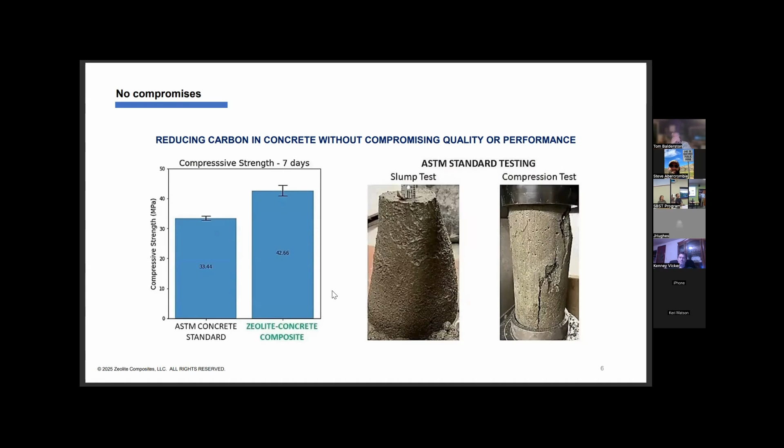We have under the umbrella of zeolite composites different brands of businesses that we run. One that we created specifically for the consumer grade products, built in the form of these pavers, which is the one going around the room, is a business called Zeolock. Zeolock now has a family of eco-green labeled solutions. These are water permeable pavers.

Specifically, we chose this format because here in Washington, specifically King County, it's really hard to build anything these days that has an impervious surface, asphalt, concrete, or traditional pavers. So what do you do, especially as there are higher density projects going forward, to eliminate those concerns or get around those requirements?

Water permeable pavers are a fantastic solution to that particular constraint for people that need to build a driveway, a walkway, a patio, other things that might be part of the architectural design of a project. These provide a significant outlet for not just the permeability requirements, but now if people are looking to reduce the carbon footprint, a significant reduction in the overall project, they have a way to do that by just putting these around the edge of the structure.

This is one of the reasons these builders we're talking to here in King County are so excited about this particular solution: water permeable had been spec'd in. They didn't know this was an option because it's new, and they're amazed it's available commercially today. They're excited about getting all the extra points from these checklists because of the low carbon nature of the solution. It's literally available to be drop shipped to your job site tomorrow.

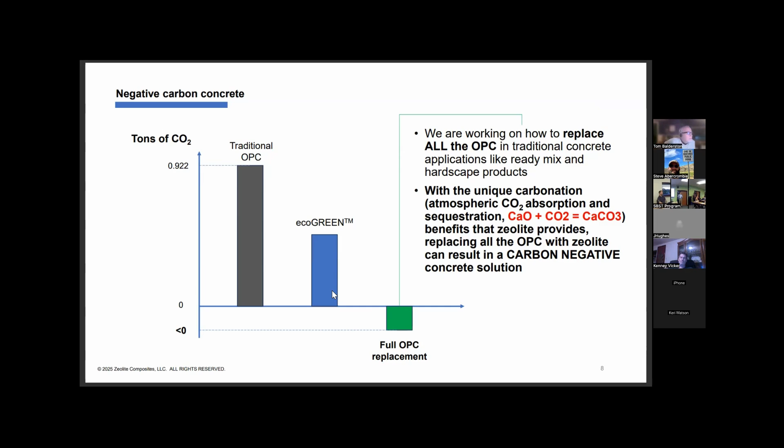Great, I just gotta say, we gotta wrap it because I gotta do one more thing, and then we're done. Okay, I'll go. Yeah, thank you.

Question - the material you're sourcing is like a mineral in the ground, right? Is there not any concern about the habitat degradation caused by scaling up production of this material, for GWP reduction across the entire United States?

It's a good question. Our zeolite source is effectively the surface of part of the Mojave Desert. When we mine - and I use mine with air quotes - it's effectively excavation. We're literally taking a giant shovel and scooping out the top 5 to 10 feet, putting it in a dump truck, sending it to our plant, processing it, and that gives you this format of zeolite. The process by which we get the right to mine that area and continue to care for it has restrictions in place to ensure the habitat isn't degraded to a point different from where we started, and there are other mechanisms to backfill if necessary. We have a very minimally intrusive excavation process, which is also an advantage, because with limestone you're blasting out of the mountain - a lot of these other solutions require really unnatural things to even get to the source of the material in the first place.